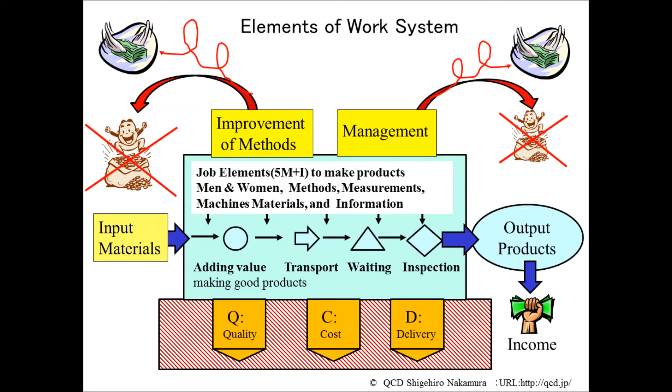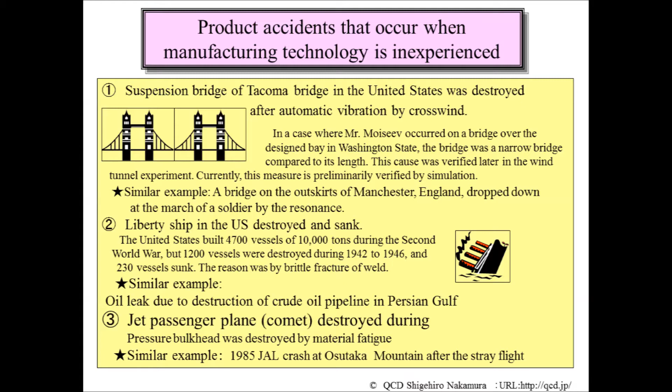The illustration shows some examples of accidents that occurred when each manufacturing technology was immature. If one physical condition remains the same, the accident will occur regardless of location or target, without fail. Therefore, in the factory, manufacturing technology must use a measure to prevent the same problem from occurring in the manufacturing process.

As everybody knows, if a product accident or external complaint happens, it will have not only a major social impact but also a significant impact on the profit and loss of the company.

Conversely, if your company owns technology that other companies do not have, this is called core value, and it will greatly contribute to strengthening company competitiveness. For this reason, each manufacturing company individually develops manufacturing technology and manufactures products as shown in the figure.

Many manufacturing techniques are scientific physical quantity management, and this will be top secret. Therefore, companies rarely give examples of their contents. For this reason, I also presented only that image in this figure.

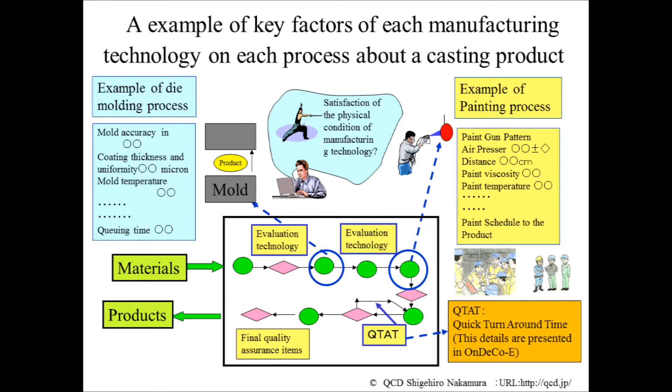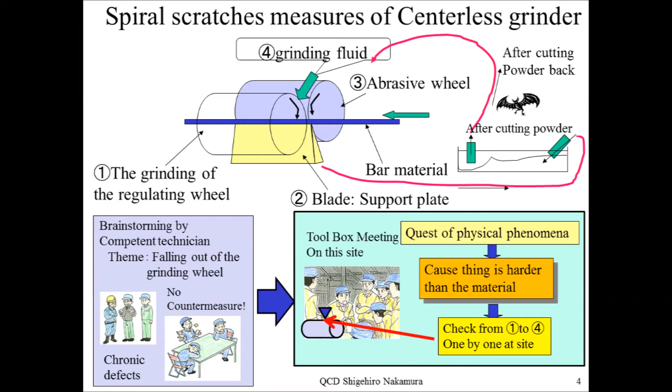This is a history showing that many veterans of processing greatly contributed to improvement of processing technology in Japan. However, at the same time, unfortunately, we have created an environment where anyone can process easily, even in developing countries.

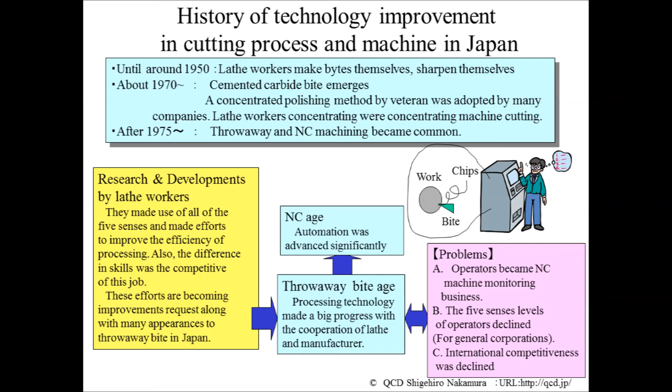General cutting machine processing technology is available to everyone. However, unpublished advanced and special processing know-how will enhance corporate capabilities. This is a measure to strengthen core value in companies.

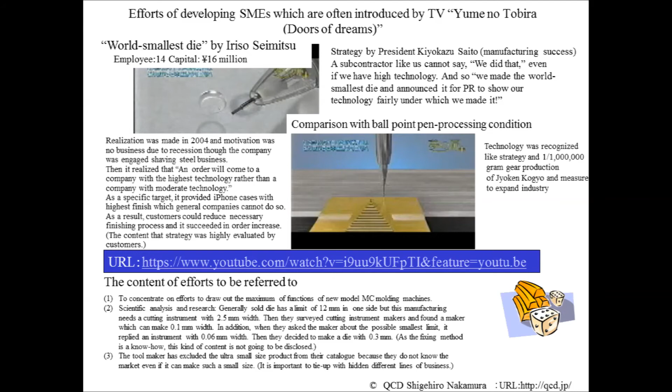This example is one of them. Please look at the URL in the figure for details, if you want to know more.

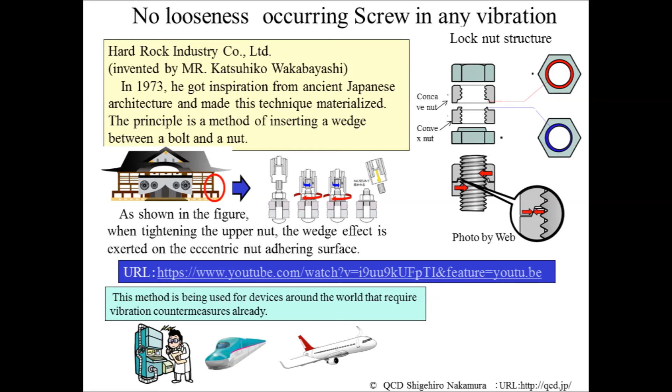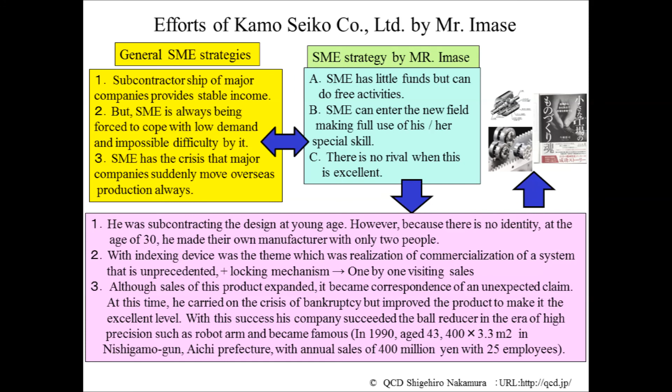Mr. Imase, the president, promoted a strategy not to subcontract to major companies. As a result, it is developing as a small but exciting enterprise.